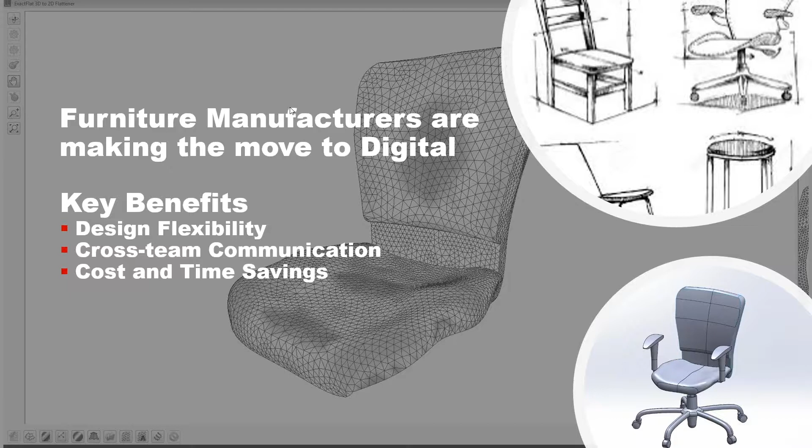Cross-team communication. So what we see is ExactFlat and Solidworks as the hub for the enterprise. So we can create our bill of materials, we can create our frames, we can create our fabric, we can send all this information out to different ERP systems, PLM systems, we can send our information to cutting machines, we can do our costing on the fly. So there's a huge benefit here for time savings and costs, of course. I'll go to the next slide

here, which is what we say: integration is key. And what we mean by that is one team creates the frame, one team defines the cushions, and changes are missed in manufacturing due to the constraints of the system. What we're going to show you today is basically how we bring everything together to work as a single unit. And I think that's a very exciting concept and one that I hope you can appreciate. So Ryan, without further ado, I'll leave it to you.

Sounds good. Thanks. So go ahead and mute yourself and get a sip of water or something there, get some hot tea.

So we want to look at three main broad ideas here. We have our design, we have our production preparation, and then we have our integration of hard and soft goods. And this is where it never has been highly integrated. And we want to show you that integration as it goes through here. So the integrated digital workflow, when we go digital, when we go 3D, really what we're looking at is a main thoroughfare of how the information is going to cross through.

Ultimately, we're looking at the linking and shrinking of the entire system. You're not going to have it spread out over a wide area. You're going to have it really streamlined, and it's going to be able to move back and forth. It'll be bi-directional. And when we look at this digital patterning workflow, we're really looking at the design aspect. How are you designing today?

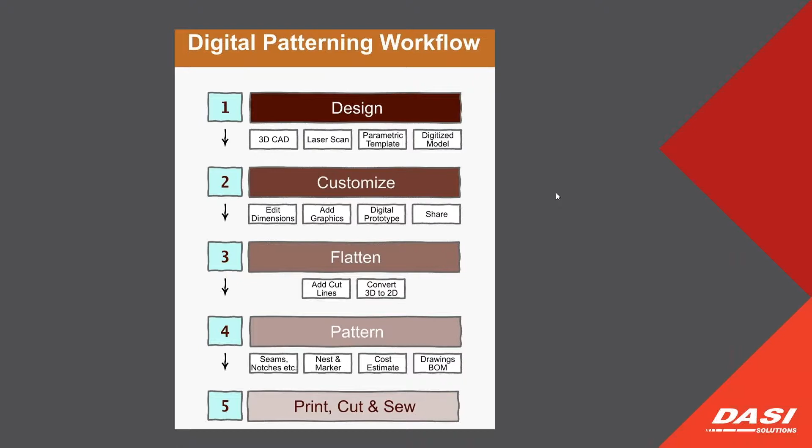So let's go ahead, we're trying to get rid of waste, we're trying to get rid of waiting. If you have a streamlined process, changes aren't the end of the world, corrections aren't the end of the world. And what you'll find is when you do streamline the process, your corrections of errors at the end seem to kind of disappear.

So let's get into a little bit of a demonstration here, and bring up a chair. This is a chair that was designed in Solidworks.

We take a look at it, we've got a couple different pieces and parts in here. We can see we have some areas we want to fabric up, but let's talk about the design aspect, especially when you get into the Solidworks side of things.

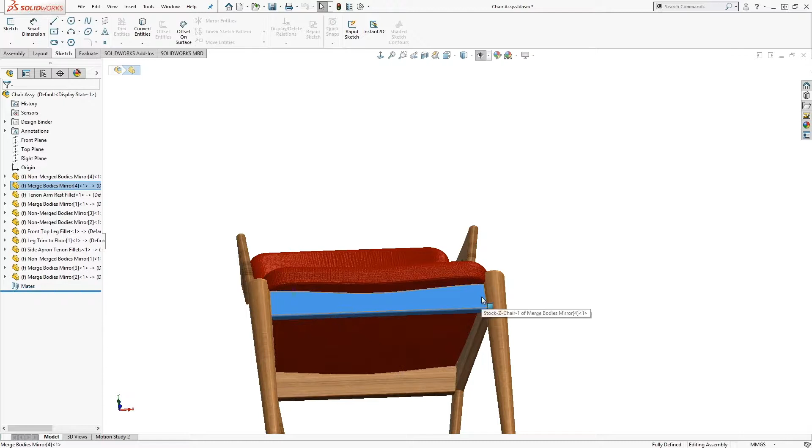So I've got this piece here that we want to take a look at. And what I want to show you is when we talk about ease of design and ease of use of the system, and making those changes, this is what it really gets into.

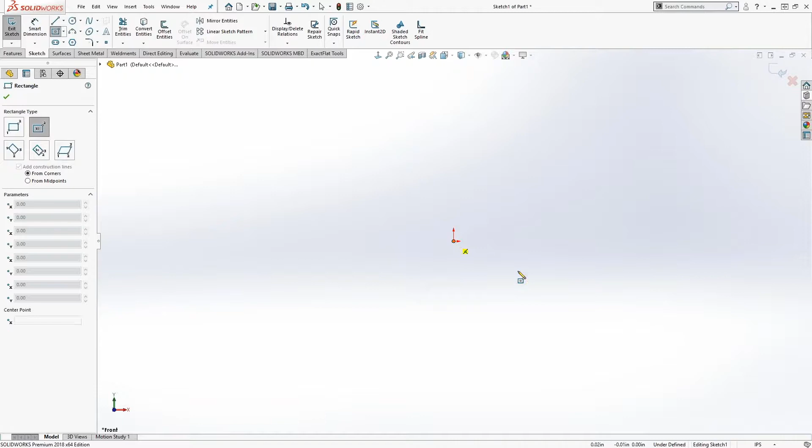So if I come in and create something new, I'm going to go ahead and create simple shapes. The simple shape in this case is a rectangle, if I'm taking a look at that cross beam there. On top of that, we have the ability to test things out.

What does it look like if it's thinner? What if it's taller? What if it's skinnier? Whatever's going on here. But once we get comfortable with something in there and what shape it is, we can go ahead and start adding our numbers in.

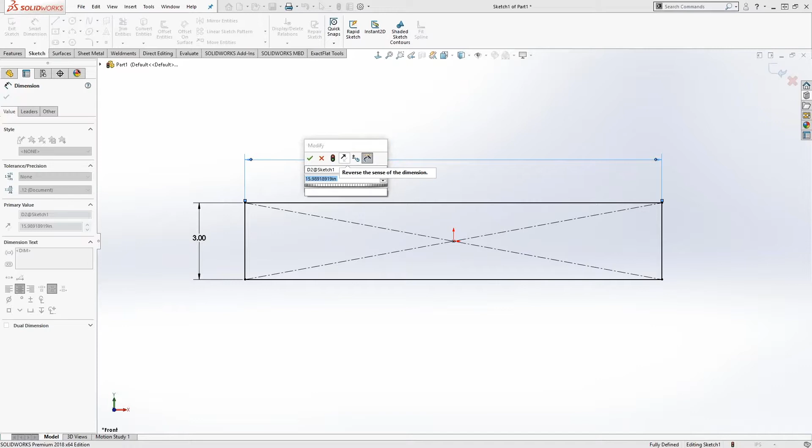So as we add these in, you'll see that the geometry comes together, starts working for us, and it'll stretch as needed. Now what we're doing here is what we call parametric modeling.

It means that we don't draw the geometry specifically to the right shape. You draw the general shape and then add dimensions on later. The beauty of it is that if you need to make a change, you simply change the number and it's going to update the geometry on the screen for you automatically.

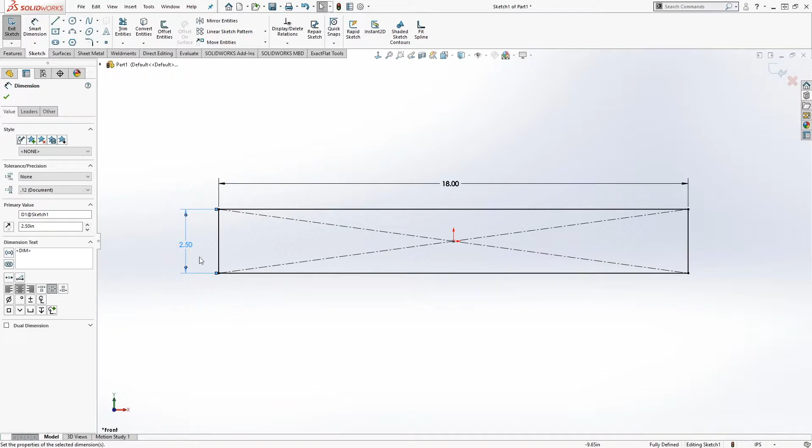We're going to go ahead and go back to 3 inches here and do an update on it. And then we'll take this 2D shape and turn it into a 3-dimensional model. Fairly straightforward here. Once you get it in, you can go ahead and grab whatever you need to, and you can see everything that's going to happen beforehand.

So we're going to go ahead and just make that 3/4 inch thick at this point in time. Also, if we take a look at this, when I say okay to that, we now have a nice little block on the screen. I know it looks simple, but simple is really how you get things done.

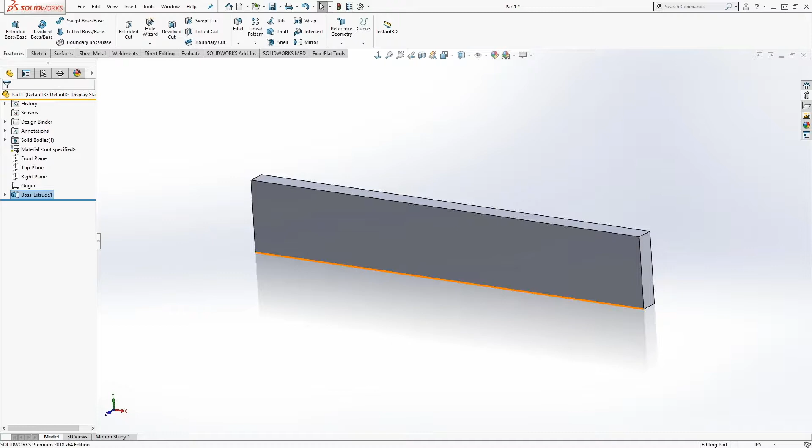We don't have to worry about the super complex shapes because we can go ahead and just take little bits and pieces here and add stuff or subtract stuff as needed.

One of the other things we had to take a look at here is that I'll go ahead and create a little bit more geometry. There's a little bit of a dip in the middle so that we have a place for the seat to sit onto. So we'll go ahead and add that in.

Along with this, what we're doing is, like I said, parametric modeling. So I'm going to add in a couple of little lines here. When we talk about parametric, we're talking about making something smart. Right now, if I take this and try to move it around, it doesn't stay centralized, and that's not going to work well later on if I have to make changes.

So just to make sure I don't have to worry about this, I'm going to make these little lines equal to each other. That means as I move one side, you'll see the other side automatically updating with it.

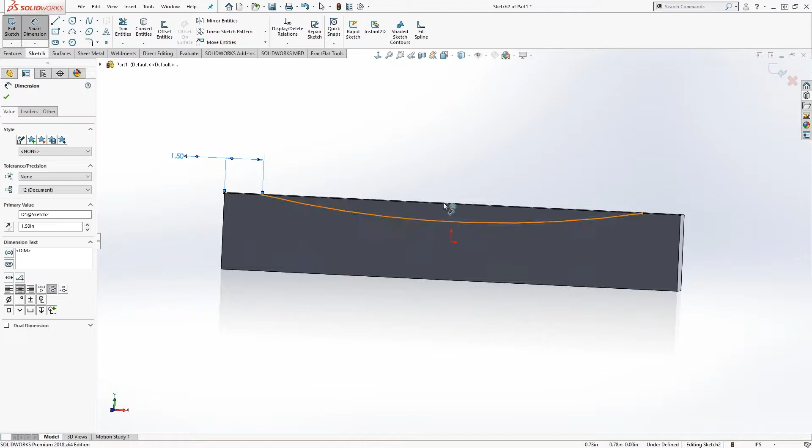Once we get it acting correctly, we can throw some more dimensions in here to shore everything up. So we can say that's 1.5 inches from the end, and we can control the actual dip here—we'll say that's 1/2 inch.

Once we're done with it, we get back into 3D, and then we can tell SOLIDWORKS that we want to cut that little scarf out there. You can see we're starting to build a shape and get it together here.

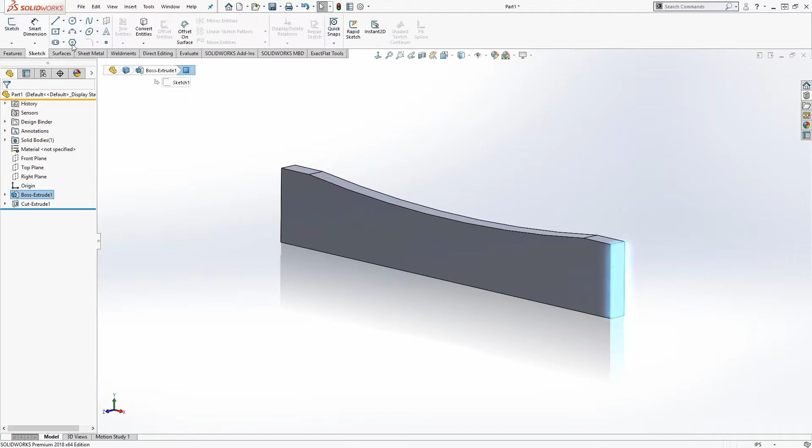Last thing I'll do is throw some tenons in here. I'll grab the end, and then once again use those simple shapes. So we'll add in a size here, and give it an overall length of 1. That's going to give me some good tenon geometry to work with.

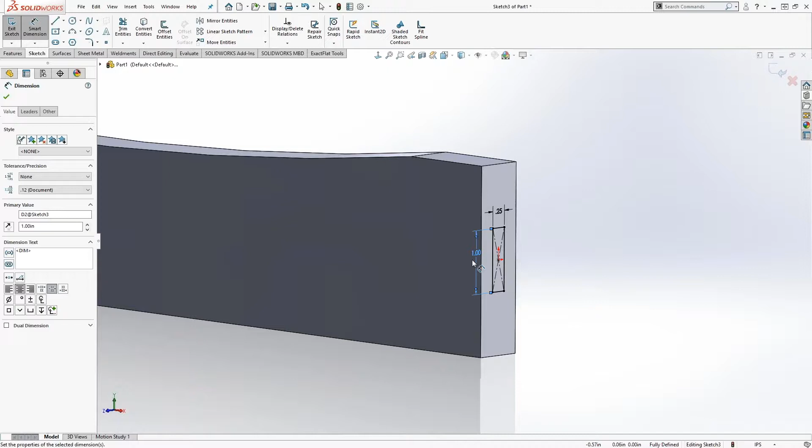As we spoke before, it's always this back and forth—you're into 2D, then 3D, then back into 2D, then back into 3D. It kind of allows you to finish up what you need to, see what's going on there, and then finish up whatever else we need to go with.

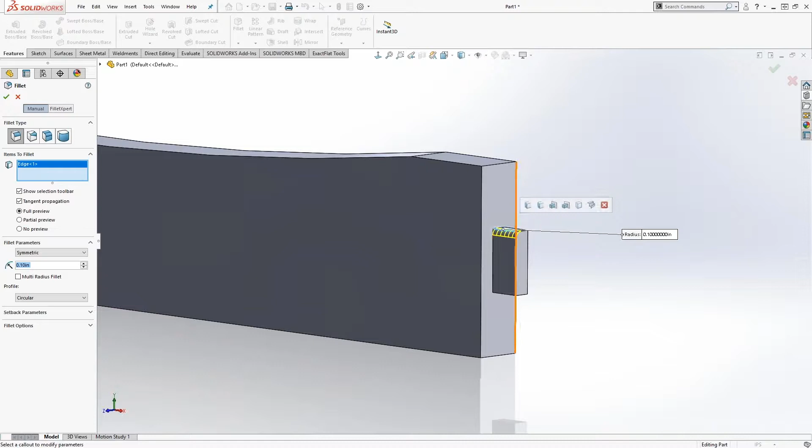In this case, I'm going to throw some fillets on here just to make them nice and rounded. I could pick all the edges manually if I really wanted to, but SOLIDWORKS offers a lot of tools to quickly add information in—type in what we're looking for, and it adds it in there for you.

I have to add another tenon on the other side. Why would I go through all that work again when I have a set of tools that lets me quickly reuse geometry I've already created here? So we'll grab everything we need and say okay to that.

When I zoom back out again, we'll see that we have that on the other side as well. The only other thing I might want to do is shore this up a little bit—I don't like the hard corners in there, so we'll put a nice big radius on here. Once again, we're getting instantaneous feedback on what it looks like, and then we can continue working with this to shore it up a little more.

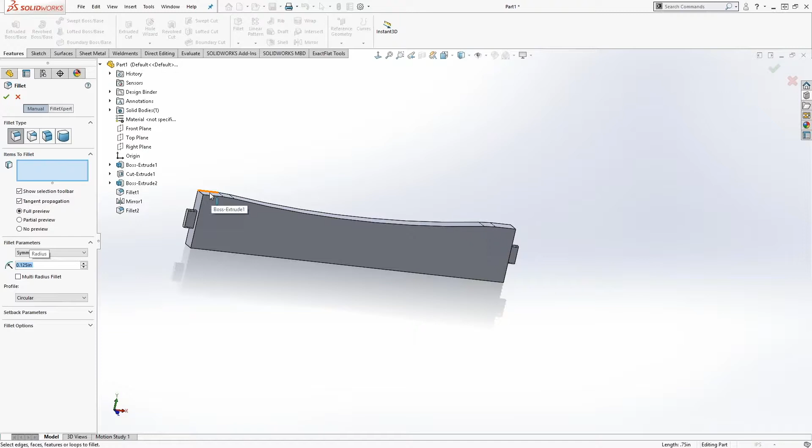So with just a couple of steps here, we're able to add in all the information required, and we have a part that looks pretty good here.

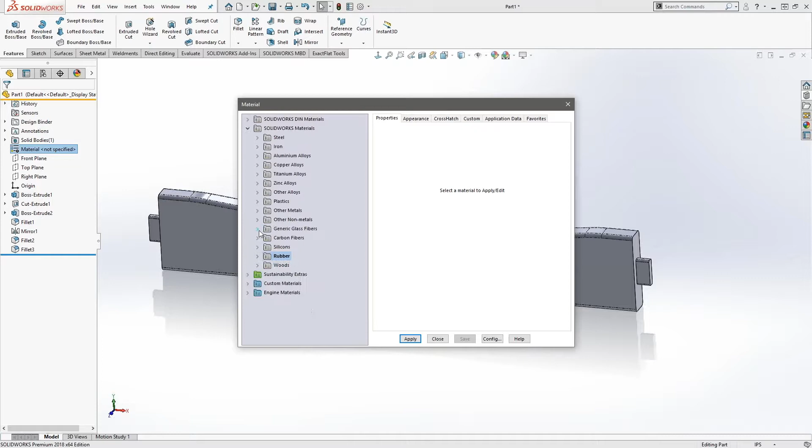The only other thing I might want to do is tell it that it's a piece of wood—depends on what you're working with. If you're working with tubing, wood, or whatever it may be, we have materials in here that will work for you. So in this case, let's make it mahogany. What this will do in the long run, since we're working with solid models, is give us the ability to do a lot of downstream processes, whether it's a stress analysis to see if this is strong enough, or packaging—how much does this weigh?

Along with the cost of the wood, you can check the volume of it and figure out what the cost may be. You may check the linear lengths of it. So there's going to be information that you might not have available before, especially if you're just doing 2D, or you're kind of just guessing and making the furniture organically.

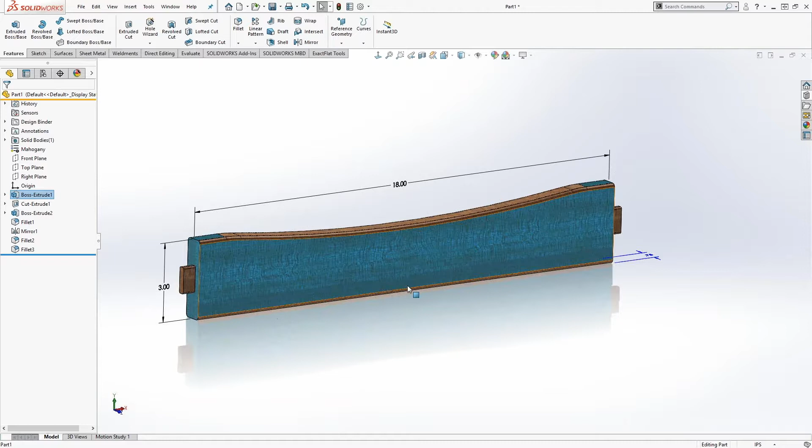The last thing I want to do here is, while I have some dimensions in here, I'm looking at these tenons, and the tenons don't look like they're long enough. So I'm going to simply double click on them and say, hey, I need you to be 1.5 inches long. So 15 probably wouldn't work out, let's do 1.5.

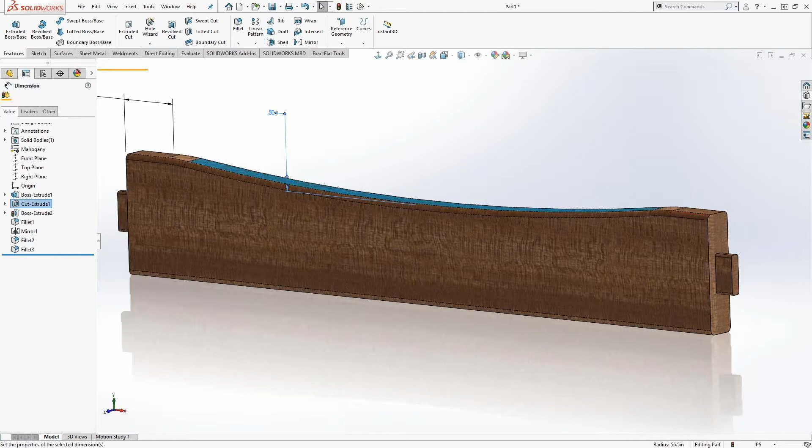Once I make that change, I can go ahead and look at some other items here. I think this dip is not quite deep enough, so we're going to make it a 1-inch dip there. And even here, let's scoot this back. So what you're seeing is I'm making lots of changes to the part, but quickly I'm able to see what those changes will look like in the end.

So it works pretty well for me in the long run. Once I get this done, I do have my 3D part, and really what I need to do is be able to communicate this to somebody else. Someone's going to have to cut this out, and I might have router information that I need to send out. So an ideal way to do that would be to create this as, say, a 2D drawing.

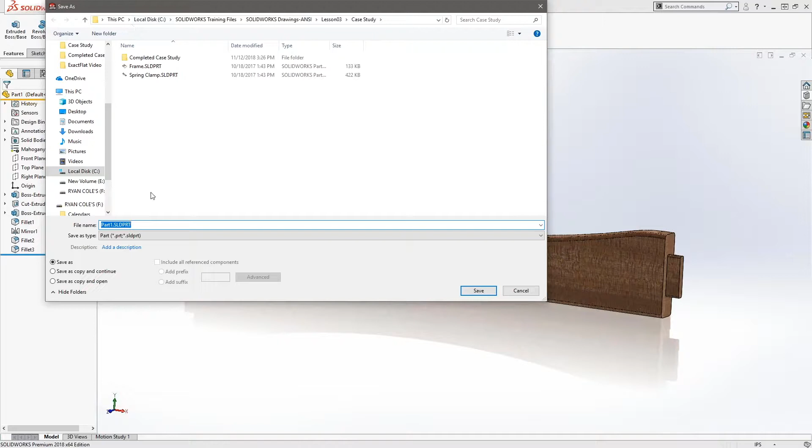Now, we put a lot of work into this, so let's make sure we don't waste the work that we put into it. So I'm going to come in and do one other item here. We're going to use something that we call DimXpert. What it allows me to do is to quickly add manufacturing information to the print itself, and let's go ahead and say okay to that.

Now you can set this up for your company, so if you are worrying about tolerances and stuff like that, it's going to be pretty straightforward to set it up. But basically what we've done there is been able to apply manufacturing dimensions without really putting too much work into it, and without having to reinvent the wheel and do extra work in the long run as well too.

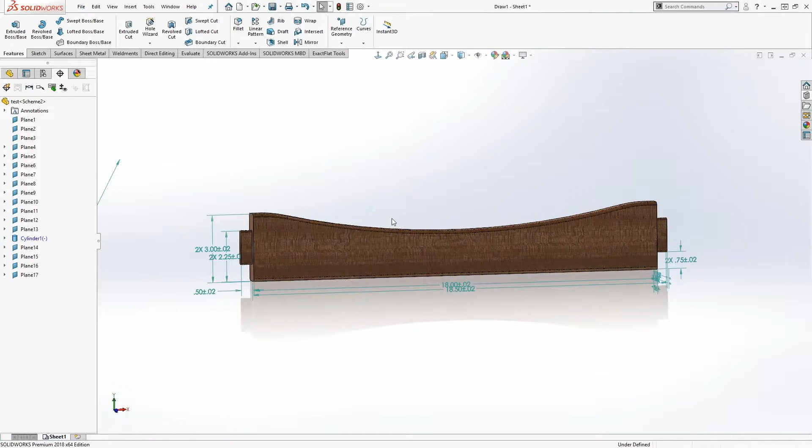So once I create that, I'm going to say I need the 2D drawing. 2D drawing should be fairly straightforward. And what I'm going to do is say that as I create the 2D drawing, I want SolidWorks to help me put the information into the drawing as well too. So I'm going to tell it to go ahead and bring in those dimensions.

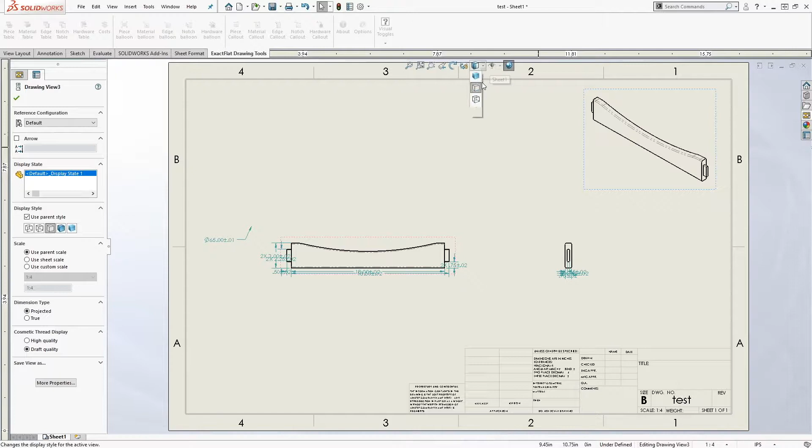As I pop these down, we can see that as I just drop them, it will go ahead and throw those dimensions in that I had on the part. And even here, we can add in an isometric just to make it look a little bit nicer. Now, even though this looks like a traditional 2D drawing, we do have a lot of benefits here that we may not have had before, especially when we get into anything like scaling or showing better information on the screen itself.

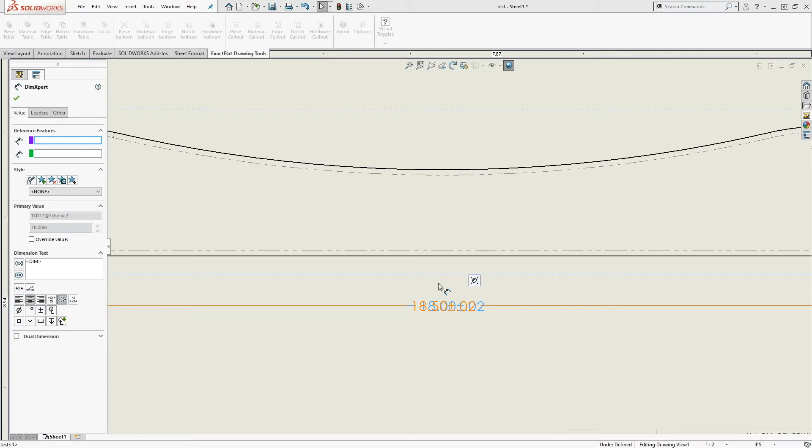The only thing you really have to do at this point, if there's any time being spent here, is going through and ensuring that the dimensions look good, they're in an appropriate place, they make sense, and kind of go from there. So we'll say that those look good there. This would be probably what I would call the fidgeting around with it, once again, just to put that information out so that the people on the floor can make the part a little bit better. So maybe spend another 5-10 more minutes with this, and you're going to be all set with it.

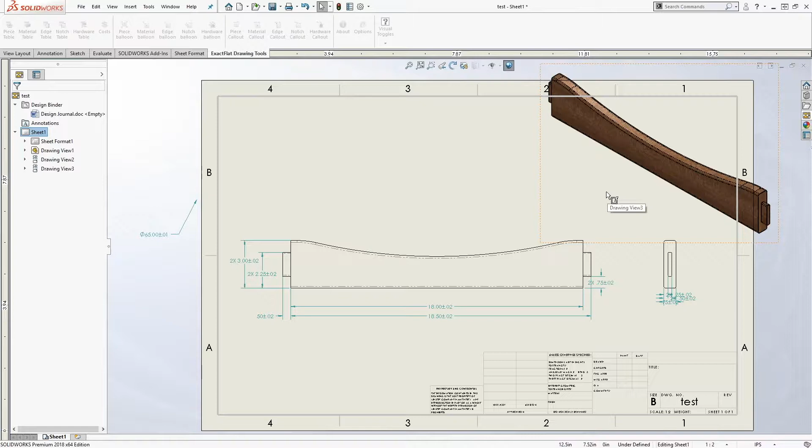And really what it comes down to is the fact that if I were to make changes here, I think that dip is a little too much anymore. So we can come back and always make the modifications as required. So let's make that 0.75, 0.745. And then we'll update the model.

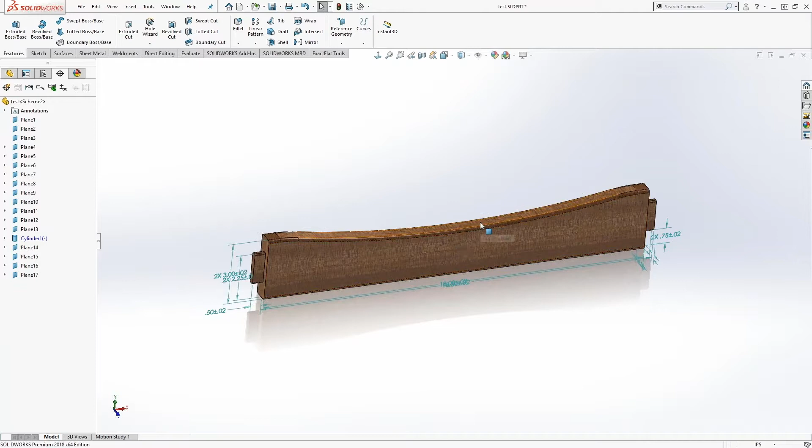We'll see that the model's been updated. And when I go back to my drawing, I don't have to make any changes to it. The changes have already occurred here at this time, and all I need to do is reprint it out. So no loss of time, no double checking. If everything was done correctly to begin with, it's going to work forever after that.

The only other thing we might get into is the fact that we do have assemblies. As you're building the parts, you're going to put these parts together, much like Legos in certain cases, and there's some more advanced functionalities that you can get into later on as you get more comfortable with the software. But one of the key benefits that we do have here is the fact that if I don't like something, well, I can go ahead and make a change to it.

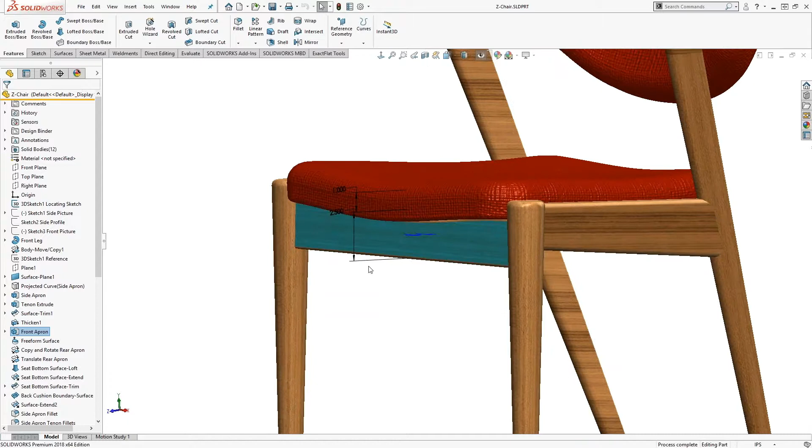So let me come in and take a look at this. And while I look at this, I realize that this may be a little bit too short. Maybe we looked at it, it looks like it needs to be a little bit longer. Well, just like we were making changes at the part level, we can make the changes here at the assembly level as well when it's all put together. Say I want to take this from 2 inches to 3 inches. I go ahead and double click on it. I tell SolidWorks to do a rebuild, and we can see that pretty quickly here. There it is. It will update it on the screen for me.

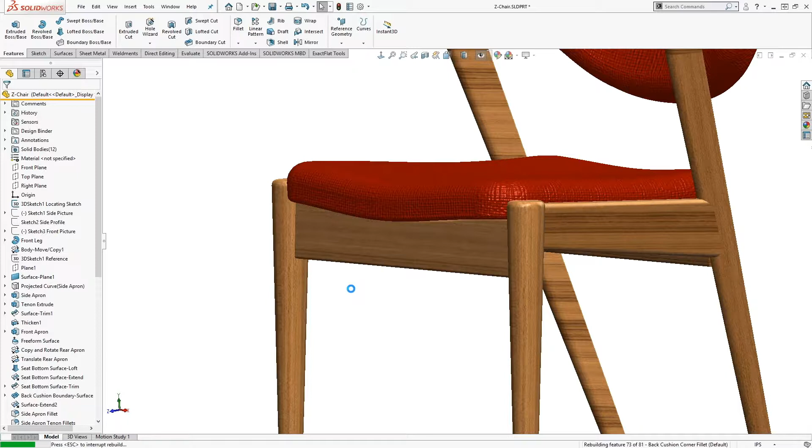So I don't have to make a change to a part, update the drawing, and then come into the assembly and go, oh, but it's not right here, and I have to make this change. Everything will be interconnected together, and everything is file referenced to each other as well. So once again, going back into it, making changes is pretty easy. It's on the fly, and we don't need to worry about too much more after that.

Along with that, you can get a bill of material out of here as well. So if you're looking at how many pieces do you need, what do you have to go with, what kind of hardware do you need if you want to put hardware in, that can all be inclusive into your assemblies. And then when you put your assemblies into a drawing, you do have that capability as well. So it is a full-blown CAD system. It should have everything it is required to create your actual engineered data.

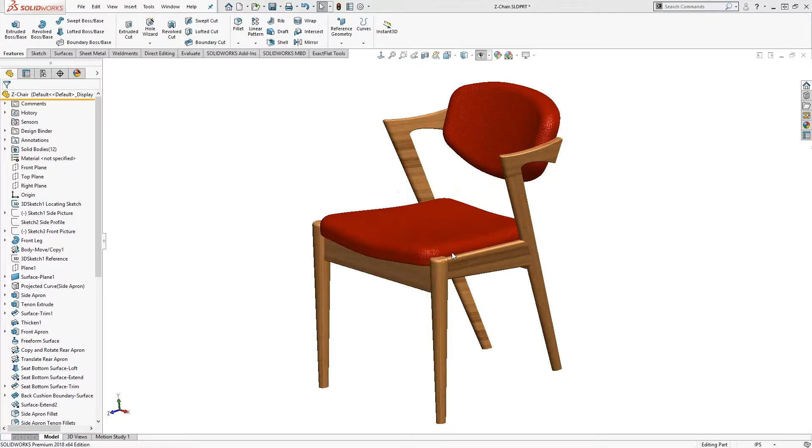So going through it there, obviously I'm going full power here, but really the walkthrough, less than 30 minutes. We created the 3D for the hard design for the soft components. Let's go ahead and go back a little bit here for more demonstration. And in this particular case, let's take a look at how ExactFlat goes into this whole process here. So let's get this part. So in this particular case, we've got our chair back, or the back of the seat here. And at this point, what we want to do is bring the ExactFlat tools into the system here. So Mark, I was wondering if you wanted to talk to everybody as we walk through this process.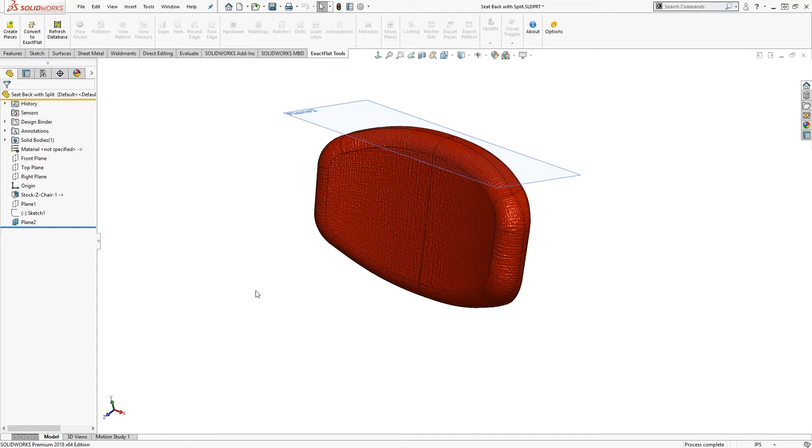Sure, I can do that. Can you hear me? Yes, I can. We can all hear you here.

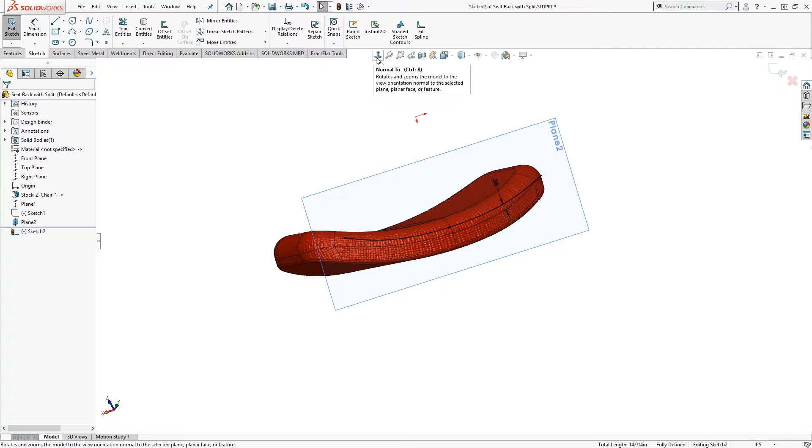Good. So basically what Ryan's going to do is he's going to use a create pieces tool. Create the seams first. Oh, he's going to create the seams first. All right. There you go. Now we have a seam. Sorry about that. So yeah, what we're going to do here is I'm going to create these seams real quick, and then we can let Mark kick in here. But really identifying those seams, this is going to be where the communications between the departments come together as well. So if you have a technical pattern maker, they can come in and either advise or even take over at this point as well.

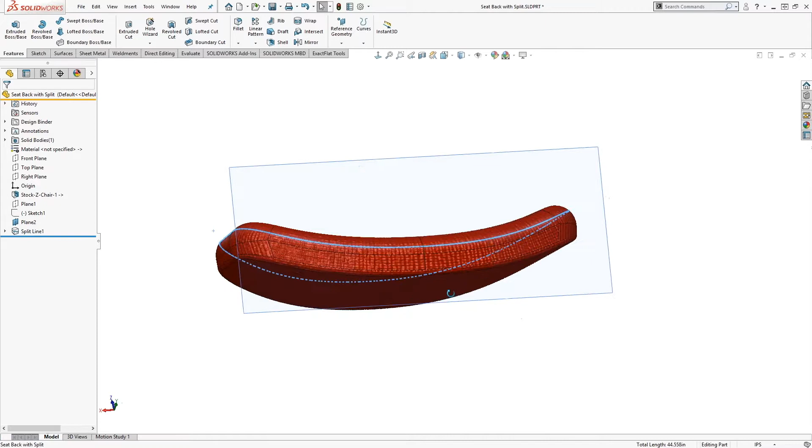So in this case, I'm just going to create some quick geometry. And we're going to tell SolidWorks where we want this to actually occur here. So as we take a look at it, before we get to the actual material and figuring it out, we're going to put a nice little slice in here. And if I grab this, we can see that there'd be a nice seam there for me to use. There's some nice seams in the middle for us to use, and there'll be a nice seam on the back here to use as well. So Mark, I will go ahead and jump into the ExactFlat tools. Okay.

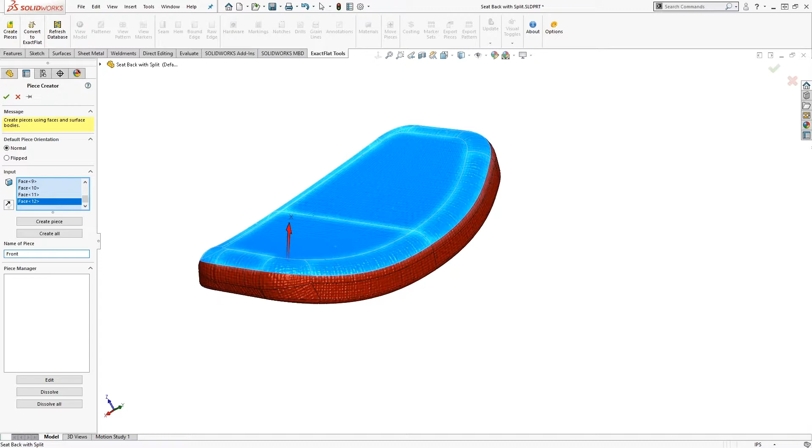Excellent. So what Ryan's doing now is he's just selecting surfaces to make a single surface. So he's joining all these patches, and it's going to create a surface. So he's just going to name it front. That's a good name. And go around, and you just basically select surfaces, name them, back.

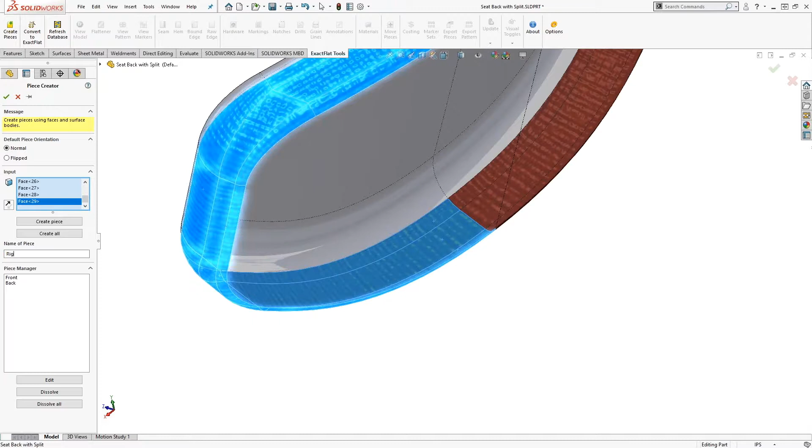And as he selects the surfaces, you can see they turn transparent. So if you had surfaces, in some cases we might have a surface underneath a surface you want to select. This makes it pretty easy to do when you make everything transparent. So now this is just about finished.

There. Awesome. Oh, I didn't type it right. There we go. Spelled it wrong there.

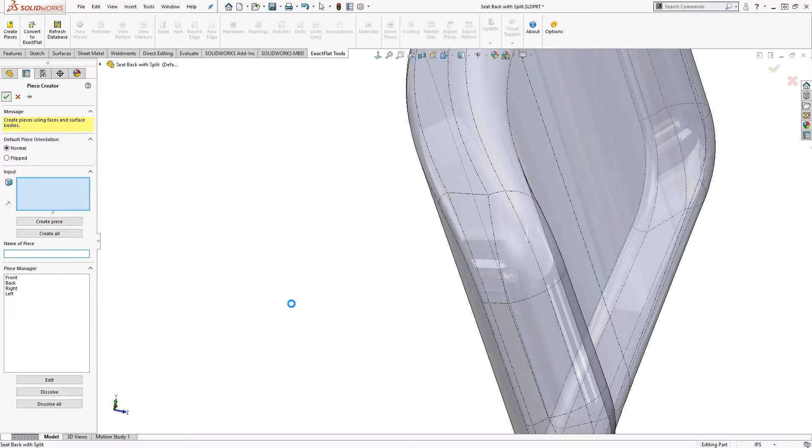So now we have all our surfaces created. The next thing we're going to do is we're going to connect to ExactFlat. So it's going to take the SolidWorks mesh, the render mesh, and bring it into ExactFlat. And now this will allow us to select what materials we're making the furniture out of. So if this was a leather chair or whatever fabric, you just go into the ExactFlat material manager and select the materials that you want to make the piece from.

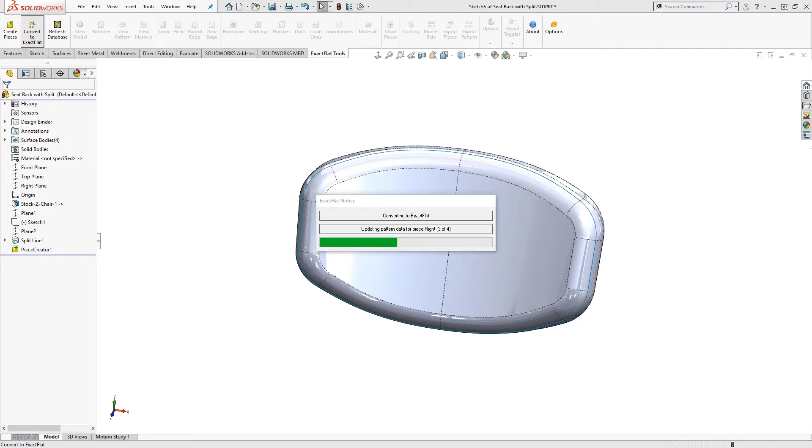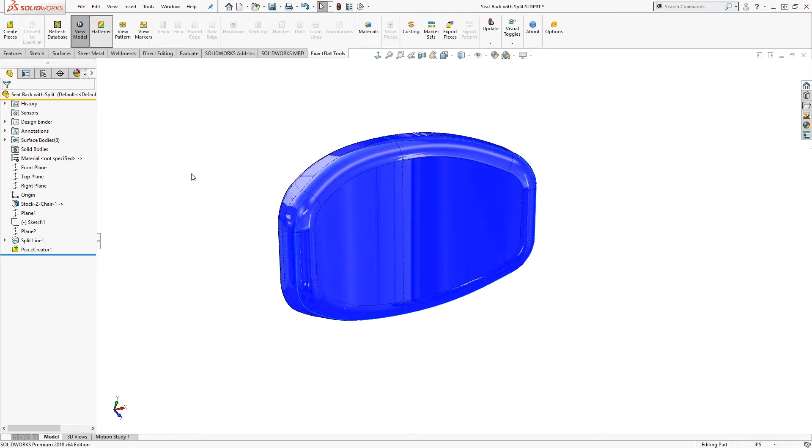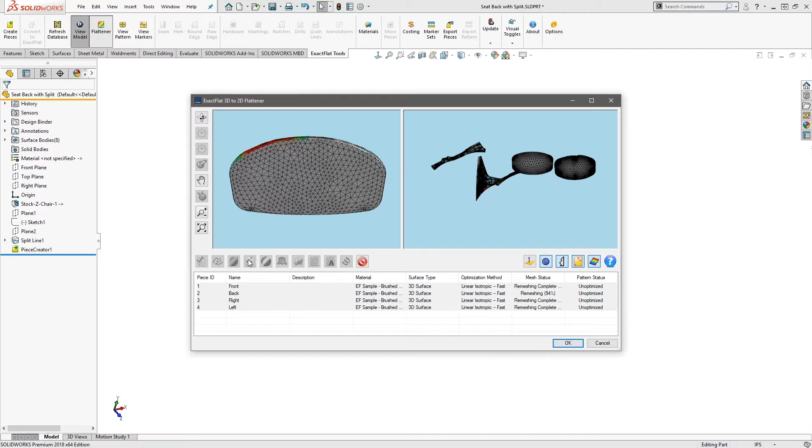So ExactFlat's a two-step flattener. The first step is this step where it gives it a projected flat, and then we're going to optimize, which means we're actually going to take the material properties and flatten it based on how that material flattens. So Ryan's just changing the mesh, doing an adaptive remesh, and now we're ready to flatten it.

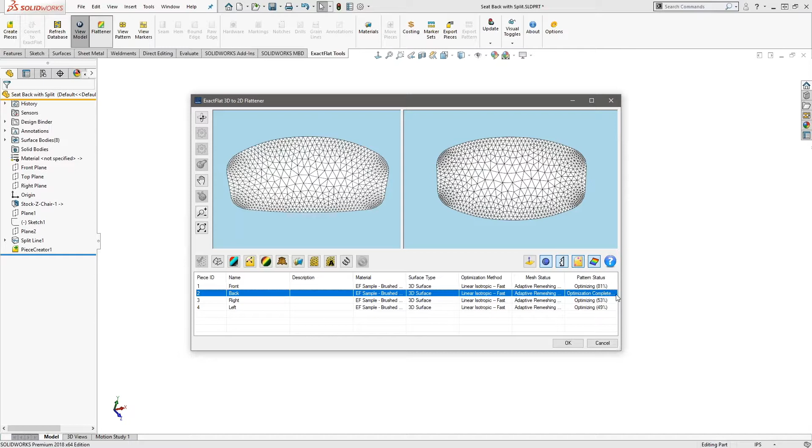So it's going to go through, and you can see the pattern status, and you can see actually the pattern piece is changing. And this is based on how that material flattens. So it'll go pretty quick here. That piece is completely flat. This one's done. And these other two little guys here will go through pretty quickly.

Let me bring up the database here. Yeah, we can talk about where this data is coming from. That's another unique feature of ExactFlat. It runs on a SQL database, and once you connect to the database, now you have base construction type. So if you go into management tools, Ryan, on the next column over, if you pick hardware types, whoops, no, the other way. Yep. There we go. It'll bring up different hardware types.

So here we have our furniture database. We have things like buttons, Velcro straps, J-hooks, labels. So we have the information of the item, the cost of the item. You can have the vendor for the item. You can assign different colors. And it's quite easy to add a new item. If you just scroll right down to the bottom where there's a blank space, you could type in whatever new item you want.

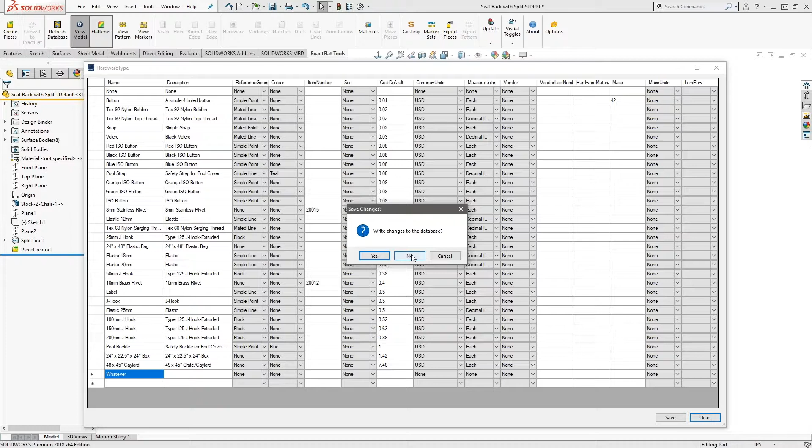A whatever. Yes, you could put a whatever there. I had to put the laptop up to my head and see what you were writing. Oh, sorry. I don't have my reading glasses.

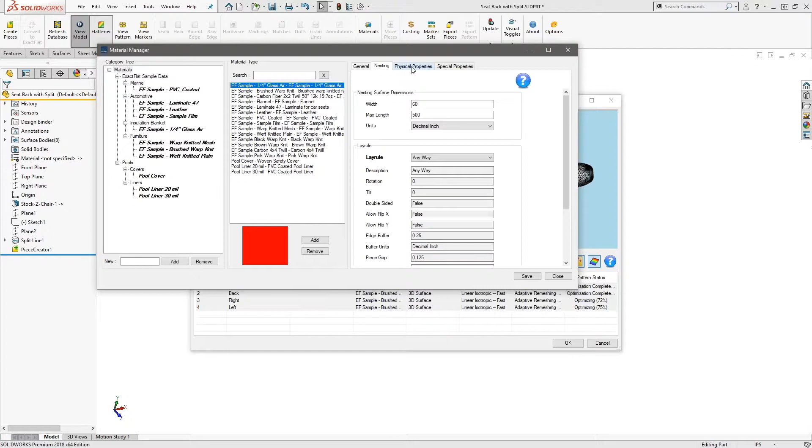Anyway, so basically as you go through, we have access to all this information, which once you tag a material, follows it through the whole stream, all the way downstream and upstream. So it's a fairly unique option in ExactFlat. And these are the materials here.

So can you click on the nesting tab? So when you have a material selected, such as we're doing on that chair, it has the lay rule. So how that material has to lay on the cutting table, the rotation, the tilt. It'll give the length of the roll, how much is left on the roll, what the width of the roll is.

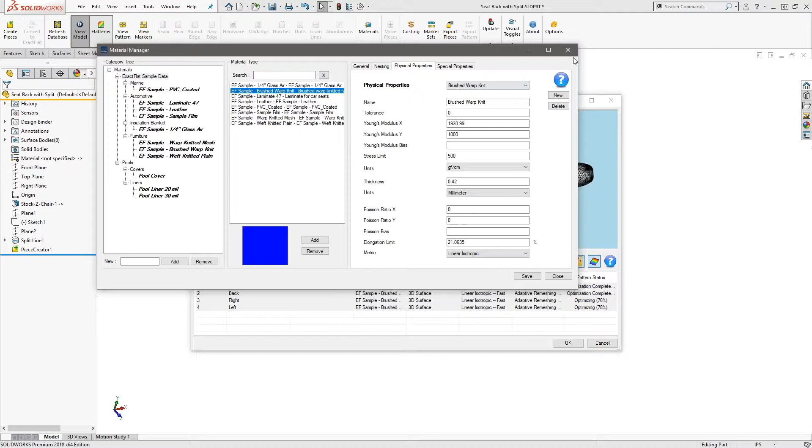So all this information is attached to that item as soon as you click on the material, and it's pretty cool. Anyway, all right, and that's the physical properties.

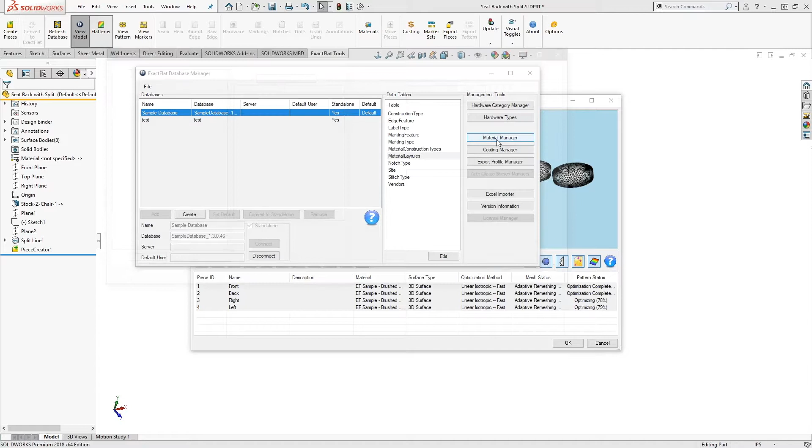So one of the things that we can mention too is that we have the ability. So if you have a specific material that you want tested, we have labs that test our materials for us. It takes about 3 to 5 business days, and it's about $20 or $25 for a material test to be done, and then you could add that material into the database. So if you don't have the material information, we can do testing for you and get that information for you.

Anyway, I think those last two pieces are pretty well flat. I mean, you could just stop there, I guess, really. Okay. Yeah, there's no funny bumps or anything on it, so I think we're pretty happy with it. Yeah.

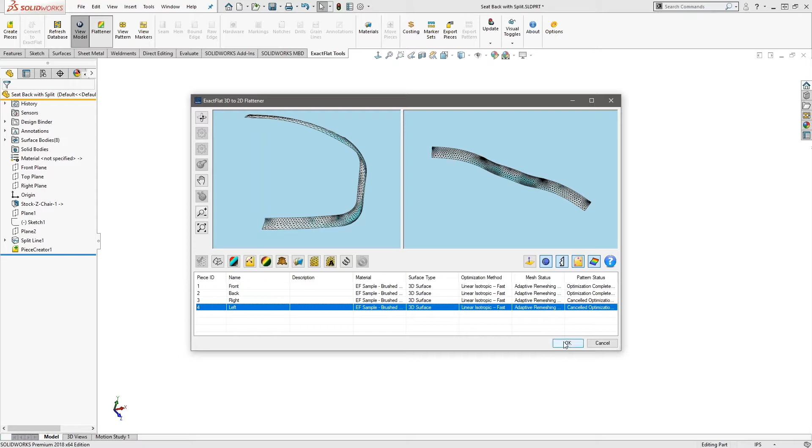So now what it's going to do is take the flattened pieces and put them on what we call our pattern view, and that's where you would add your seams and notches. So it's going to rebuild these pieces from that step and go into, as I said, the pattern view. One of the tools that we have is a tool called, pattern makers will understand this, walking the pattern. So we're able to match pattern pieces together. If you had a file that might be 10 or 20 pieces, you can use that tool and you can align all the pieces up, and Ryan can kind of show you that too.

So, this will take a second. Sorry about this. It's got to align all the edges up. What else can we talk about? I guess the other thing would be... I don't think it's ever taken this long. It is a program, right? Yeah. I think it's the last piece it's doing. Yeah, it's the last piece. I'm telling you, it's my computer. It's messed up. I got my IT guy working on it though. Oh, there we go. Yeah, it is those last pieces. It's drawing that geometry, trying to get it in right. It's 3 and 4. So it went through 3 and now it's working on the 4th piece, but it'll take a second. It'll snap out of it.

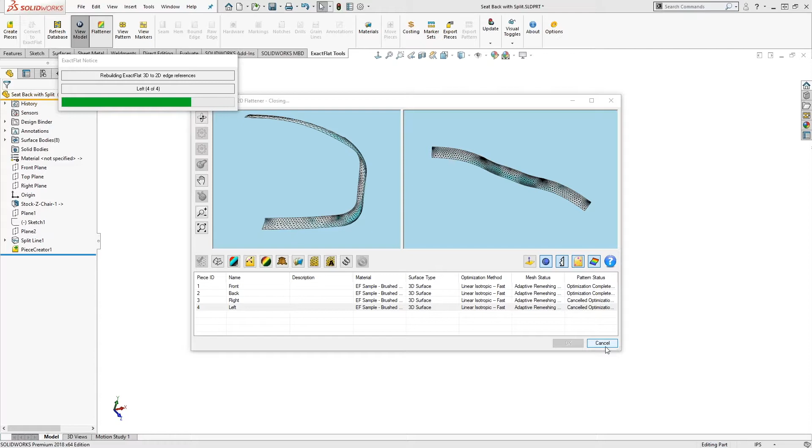So as far as that testing, I've had a couple customers go through the testing, and you are right. It took about 3 days to get it back, and it takes less than 5 minutes to actually get that material in the system. So it's not some long drawn out process, which I was really pleased to see. Yeah, and if customers do have the data, we have the ability that you can, I call it hand bombing, type the information in yourself. Although some of the mills don't provide all that type of specific information, so it is good to get it tested. And it's reasonable. Definitely. Oh, there you go.

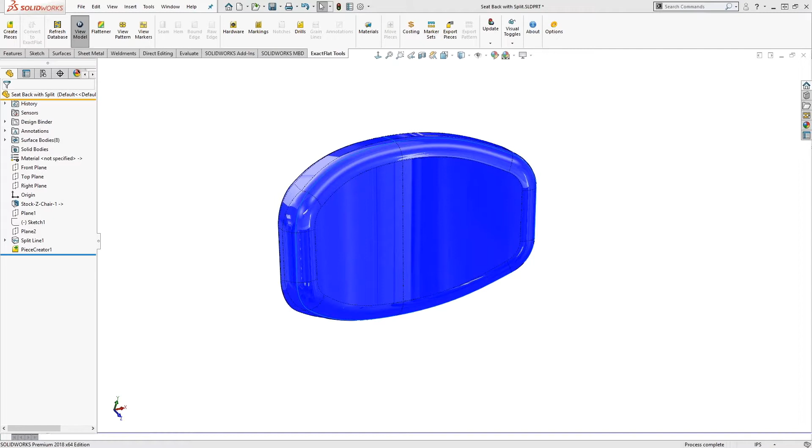All right, so now we're going to be updating, and I think this is where the flat's actually being generated after it's figured out its geometry. Is that correct, Mark? That's exactly it. So all the pattern people know, the flats and setting up the, there you go. So those are your pieces, all flattened.

So I'm going to move these around a little bit, and if you want to tell them what I'm working on here. Yeah, so this is what I was saying before. We call it walking the pattern. So what you're doing is you're just lining the pieces up, and you'd select an edge, and we have a tool called a find tool, and that's what Ryan's doing right now. So you can basically see how the pieces are going to line up and how they get sewn together. So if you do like Ryan's doing a 1-inch seam offset, that'll allow him to actually throw a seam on there and see where it's going to go when you put your notches in and whatnot.

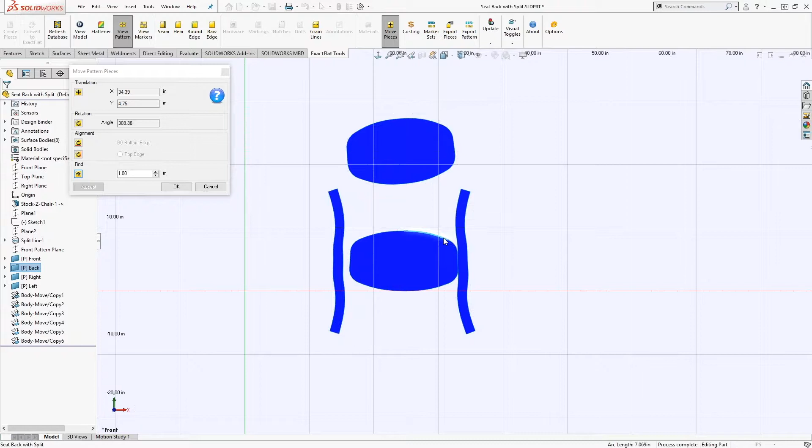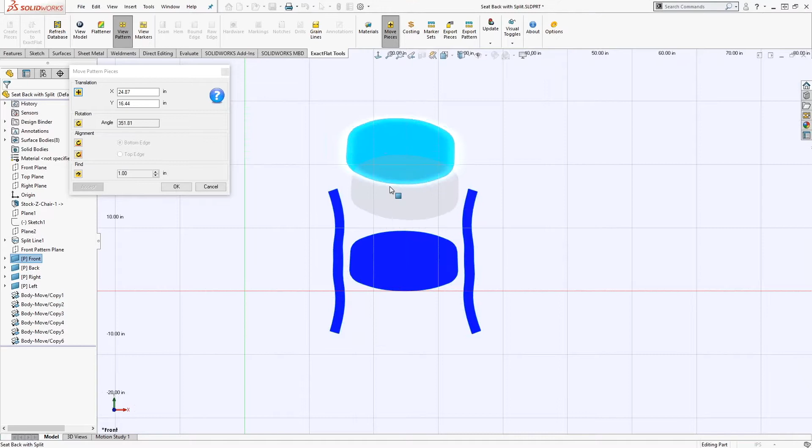But in the old days, and it's still done this way, you would actually take your 2D pieces and you eyeball where the two pieces join together, and then you put a notch and make sure it fit on the other side. In this case, because we're coming from a 3D model, we know where all the coordinates are from the 3D to the 2D, so it allows us to do walking the pattern automatically, or automagically.

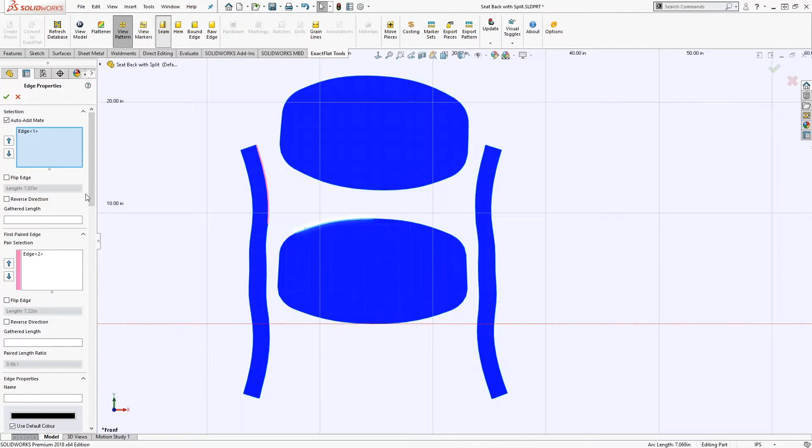All right, so now that we have that in, probably the next step would go to seams. Yeah, let's throw some seams in there. The seams are coming out of the database as well, so yeah, the 2-inch seam might be a little bit too much, but there you go.

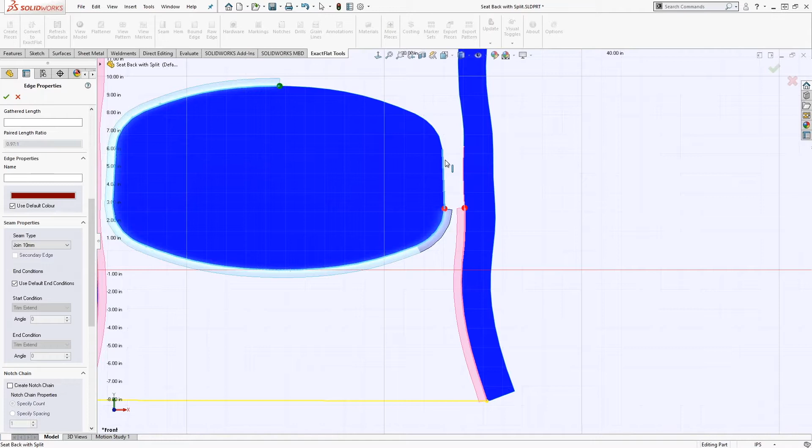Yeah, 10 millimeters good. So as Ryan's selecting one edge, you can see the other edge is automatically being highlighted, and as he goes around the edge here, it's going to create a nice seam for us, and you can see the start and the stop of the surface. So basically, we're going to do the seam on the other side, and then the next step would be add a few notches.

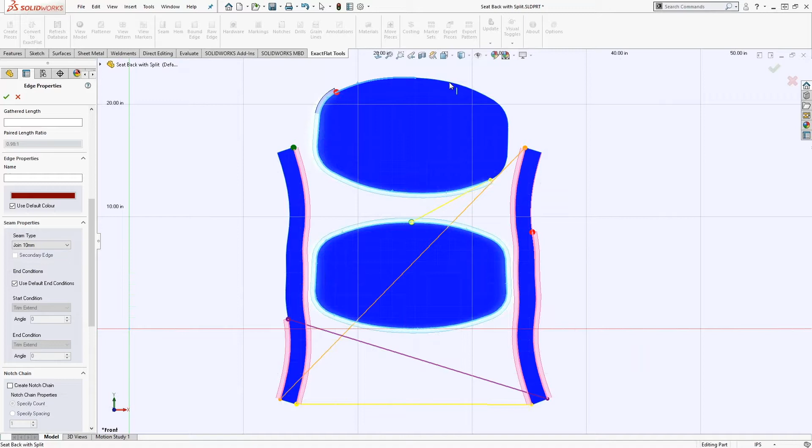And as I said, all this information is stored in the database. So we have some customers that might have 20, 30 different notch types and a whole plethora of seam types. So all that information is stored in the database and is completely customizable by the user. So we're going to create a notch chain, come up from the database, ask what size notch we want. In this case, we've got a 1/4-inch V notch, and it's put 3 notches there.

So you can either do it by number of notches on a part, or you can click specify a length. Oops. There you go. There's all the notches because they're 3.94 inches. And they all line up perfectly, so no eyeballing.

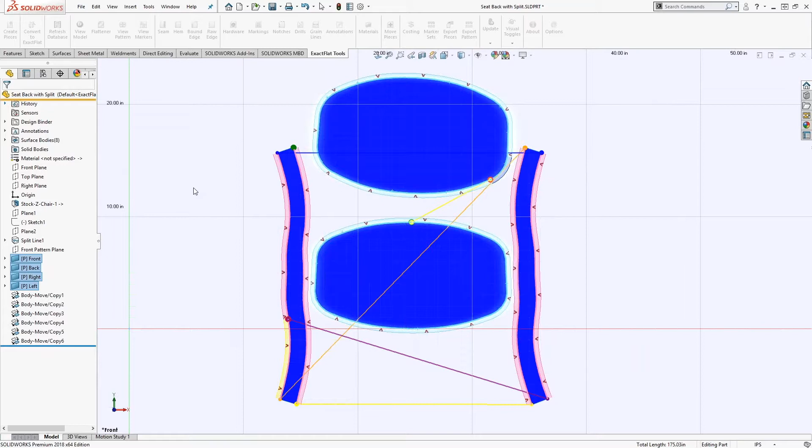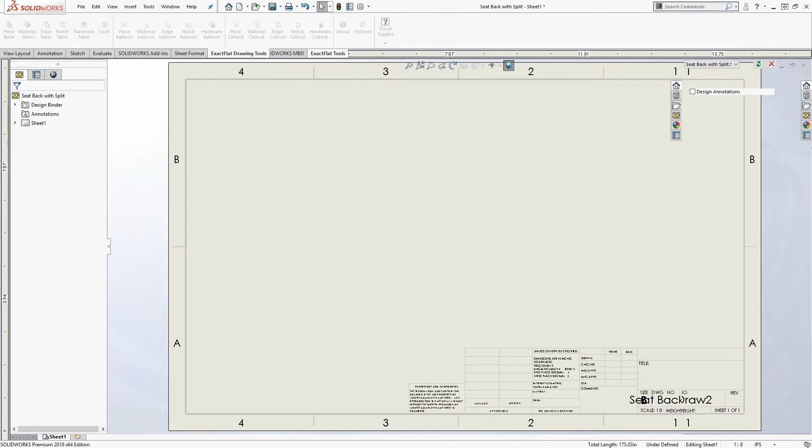All right, and then probably we want to look at drawings too, right? We talked about drawings, so let's go ahead and turn this into a drawing. And so we'll kind of jump back into SolidWorks here for a second. And it kind of works the same way. Even though it came from a different piece of data, we still have the ability to go ahead and drop that flat in there. You can see that not only do we have the seams showing out, but we do have our notches in there as well too, and they'll be able to see those together.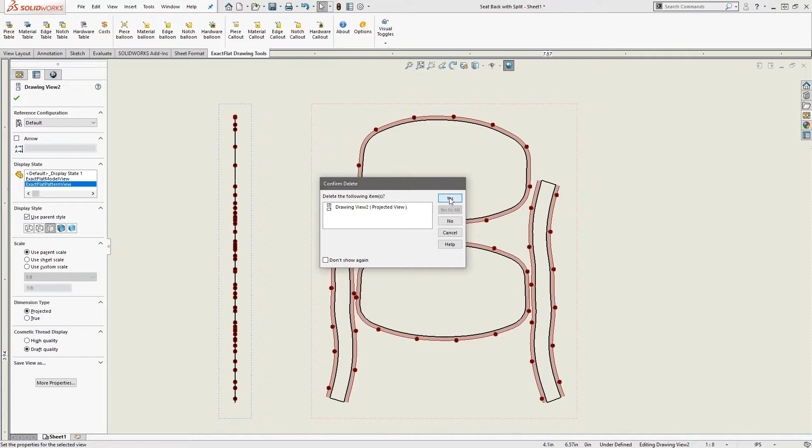Along with that, we're going to want to go ahead and put some other pieces of information in. And this all depends on what you're looking to do here. So in my case, let's go ahead and we can throw in the piece table. Piece table is just going to basically give us a list of all the pieces that were in here. And we'll also see that they get a piece ID along with the piece name as well too.

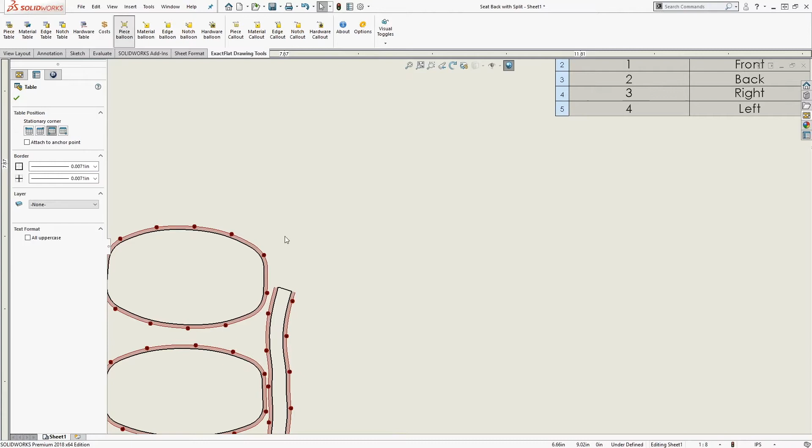And the piece ID is basically going to get connected up to this particular, there we go, this particular piece. So as I tag these out, we'll see that everything kind of just conjoins together. But up here, we do have material balloons. If you are using different types of material, you do have the ability to call out the different types of material. You're not relegated to one material per part as well too.

If you're using maybe some suede and you're using some leather together, then you can actually have that mixed on the single piece, and that's where the material balloon would come out a little bit nicer. If you need to talk to the people that are actually sewing it together, you can tell them what the edges are, what the notches are. If there's any hardware there, whether it's a J-hook, a snap, Velcro, you can go ahead and call that out as well too, much like an assembly inside of a 3D CAD system.

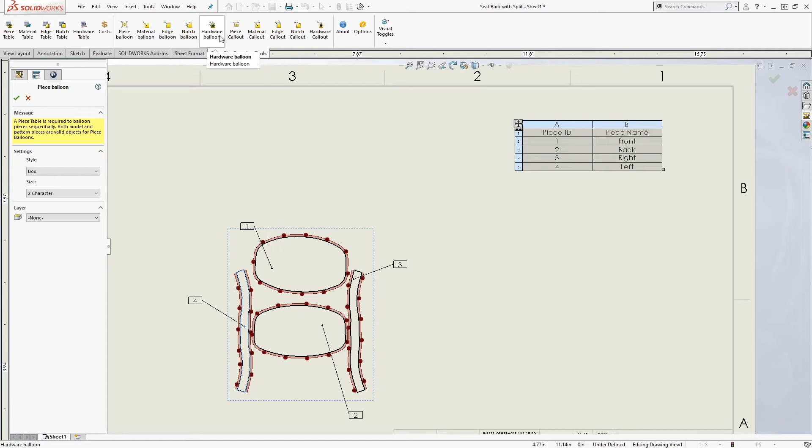Other than that, we can go ahead and get out of here. We do have the costing capability. The only other thing that we would probably want to cover here is your final outputs. And let's flip back over to the component here. And if you want to walk me through this process here, this will be under the view markers, correct? Yeah, absolutely. So the next thing is you want to go out to your cutting table.

So we're going to have our marker view set up. Ryan's got the one piece and it's ready to go to the cutter. ExactFlat has 2 capabilities. It has manual nesting, which means that you can just drag and drop pieces onto the marker just like that, and we have collision detection, so it'd show if you bump into something, you can't do that. But we also have automatic nesting, and automatic nesting just creates a nest automatically for you.

It takes the parameters. If we were doing 200 of these chairs, it would just throw 200 on the marker, and it would nest those, so it compacts it to save as much material as you want to let it run for. Anyway, in this case we'll just hit export, and we'll export out this file.

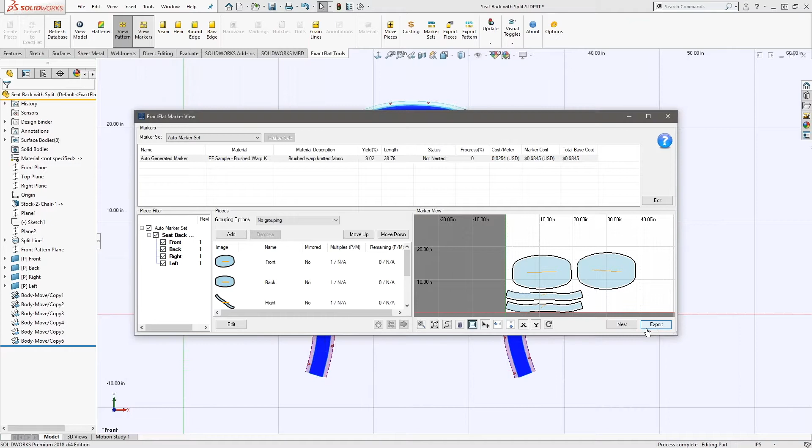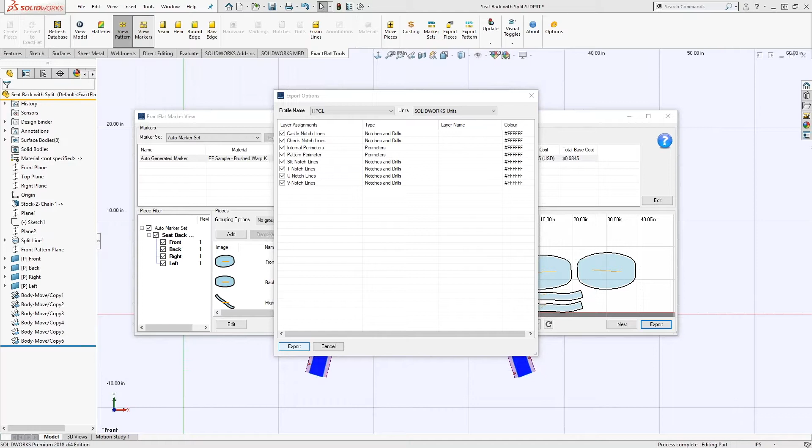And we select our cutter. We create profiles so we can export out to any cutter, Gerber, Lectra, Eastman, Autometrix, whatever cutting system you're using, and I'll just create a file that has a profile. So it's a DXF file that has a profile that would have the layer information required for that cutter or plotter, whatever you're using.

So we just created this auto-generated marker and put it on our desktop, and we can show you. Right now it says that the part's ready to view, so we'll view the part in eDrawings. And that's just to verify that data was written out.

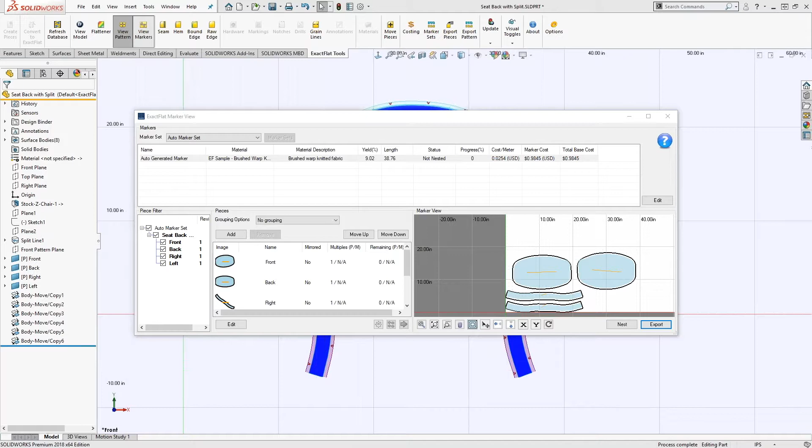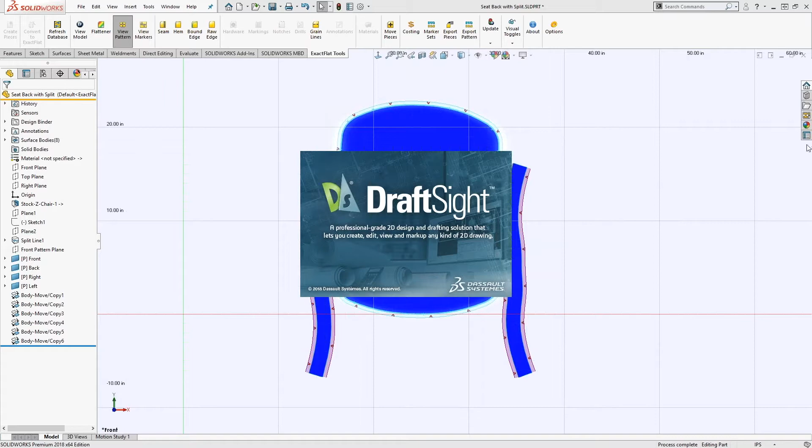Oh, DraftSight. Dang it. Sorry. I don't know why it's opening in DraftSight. There's your verification. We'll just look at the verification. So eDrawings is usually what I would use. I had this one turned on for some reason. I do apologize for that.

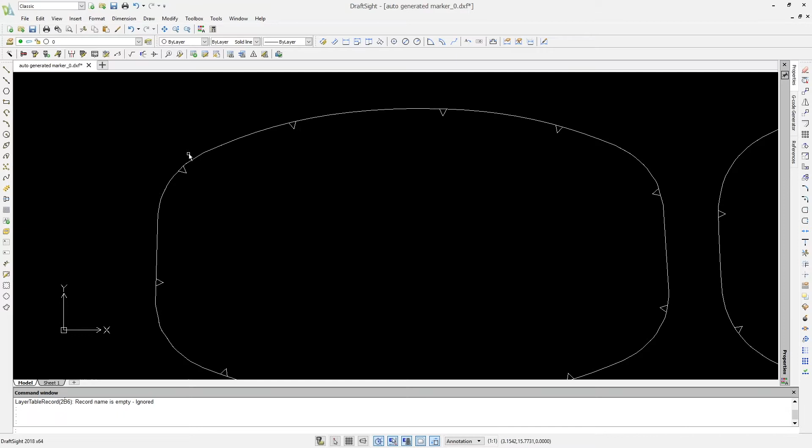But you can see that not only the outlines are there, but also your notches. So when you send that to the laser, when you send it to the cutter, whatever you're using to do that, that's all just going to come through. So right on.

Let's get out of there. Cancel. It's the last time I let my child use my computer. That's what we'll blame that on.

Okay, well, let's take a look at this, going back into here. So best practices for furniture makers. We walked through this and we did a lot of talking. There was a little bit of wait time you saw there, but that's probably worst case scenario. There was a lot of stretching that it was trying to account for, and it is accurate data as it comes through. So what we walked through was creating the 3D design for the hard and the soft components. We prepared all the parts for production.

We didn't do the CNC, but SolidWorks does come with a 2.5 axis CNC addition already inside of it, and even at the base level of SolidWorks, it's available to you. So getting information out to a router if you are cutting wood and stuff like that. But even if you get a little bit more curvy and more 3D-ish and you're looking for more complex patterns, there are steps to get those in as well.

Once we created the patterns, it was pretty straightforward. We added our seams in, we put our notches in, and then we ended up just sending out that DXF to the cutter, and we got it so that it worked with the cutter automatically. And that's going to be one of those little setup things that we just make sure that you're all good to go from there. We want that to be a click button solution, and that goes back to the whole linking and shrinking.

The other nice thing that we have here is if we were to make any changes on the 3D model that we'd already done the patterns on, it's actually a pretty easy button, and I'll just point to it. There is an update regimen that you can go through where it will re-flatten everything back out for you and figure out if there were any changes, if there was a length change, a size change, those patterns will update again. And then once again, it's a simple process of going into the view markers and re-exporting it back out to the cutter to get that change cut out as soon as possible.

Managing the changes, there's communicating updates across the team. It doesn't take forever. It doesn't take one person to do one thing, one person to do another thing, trying to communicate back and forth. The programs are actually pretty easy to use with a little bit of training. And once we get you into the program, we find out that those changes are very easy.

Any one person could probably do a change, but even if they don't want to do that change, they want to communicate, it's an easy process to get the change done and have that move downstream. And really, that's that whole waste and waiting that we're getting rid of. It's not you say one thing, someone else does something else, you wait for it, then you reprocess the data, then you bring it back in, and then you find it's not right.

It gets rid of that. It really does streamline the communications. The other benefit is you're ensuring the fit interactively. We're making sure that it fits before we even start cutting.

We don't have to do a test run, we don't have to build a mock-up. In a lot of cases, especially on this chair, once we get comfortable with the program and know the ins and outs of it, you can give it one try and next thing you know, you're fitting everything up right then and there, and it's a good product on your first prototype as opposed to doing multiple prototypes.

So we talked about a chair. This may not be directly in your market, but really what we're talking about is the hard goods and the soft goods and the final melding of those together without having to bump out of the system. Once again, that's the linking and shrinking of the entire process.

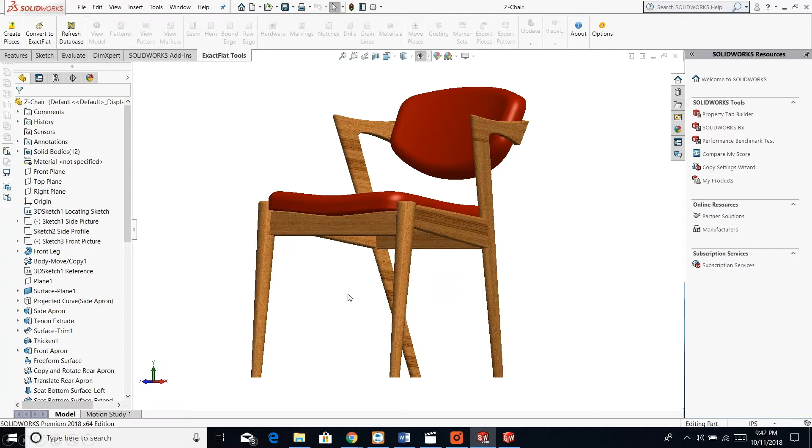I guess at the end of this, what we'd like to do is address a couple of questions that came through. It looks like there's at least one question from Nathan. I'd like to go ahead and attend to that. So Nathan asked, how do you mitigate the patterning for cushions that are not directly fabric on foam?

A feather wrapped foam slab as a seat cushion - would you model the crown effect created by the feathers in SolidWorks, or model it as a piece of foam that gets wrapped in Dacron? Do you model the foam dimensions, or the foam plus the Dacron?

This is one of those things where I'm going to throw that over to Mark. Mark, did you hear the question? Yeah, yes, I did.

So basically, I'm trying to envision modeling the cushion itself. I'm very familiar with doing the engineered foam, where we're basically just taking the surfaces - I can use an example. We did a wingback chair previously in a demonstration a couple of years ago, and what we were doing is extruding off from the cardboard surface that was on the inside, extruding that out and creating the cushion, then using the surfaces of the cushion to flatten. We created our seams and everything just as Ryan did, and we flattened that, and it was very accurate. We were able to create those patterns quite quickly.

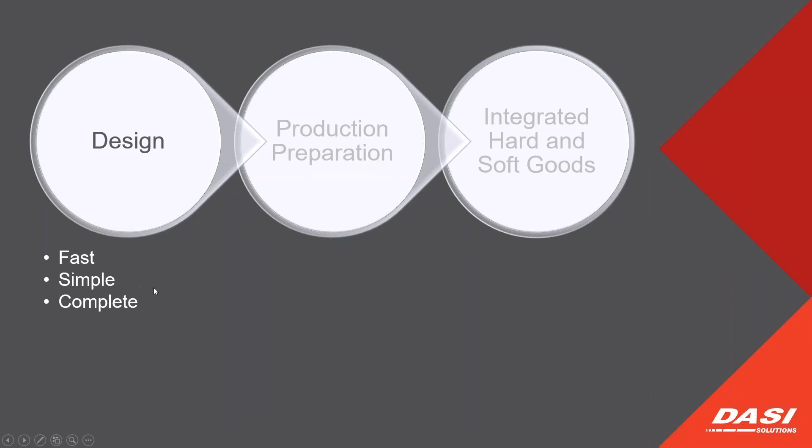When you get to the production side of things, the CNC simulations, the fact that you can actually run your cutters inside the program and then send that information out. The pattern details, knowing how they're laying, what's laying, how they look flattened out, adding in all the little implementations you need, your notches, whatever it may be.

And then you come down to the assembly instructions as well - how do you put those together? That's going to be good for most, for the hard goods and the soft goods.

Last but not least, single design environment. You'll notice that I stayed in Solidworks the whole time unless I was showing you something. You do not have to export out, you do not have to import in. Once you get it into the Solidworks environment, you stay in the Solidworks environment and everything back and forth goes from there.

You have better cross-team communication, the ability to look at that information and make changes. With our different viewers, you can either give someone access to look at something or access to change something. Ultimately, going back to linking and shrinking the entire process, this reduces cost and time, which is what's on everybody's radar. Once everything works well, it's going to be nice and streamlined. We're always shooting to get it most correct the first time out, and it just gets better after that.

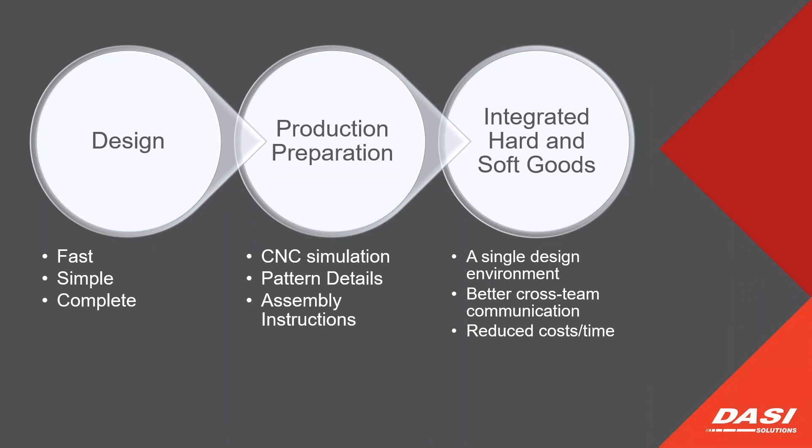I do have a thank you slide, but we got a question from Matthew. It says, does this work the same in Rhino? I'm going to throw that over to you, Mark. Does it work the same in Rhino?

Rhino is a different package. Rhino has the flattening capability, and they both have the same flattening engine. The difference between the Rhino version and the SolidWorks version is that SolidWorks has all these integrated tools, seam tools, notching tools, and a much more extensive database. So if you're just looking at flattening things, yeah, they both flatten things. But if you're doing a lot of seam work, creating nests, or if drawings are important to you, then obviously the SolidWorks solution is the premier solution.

I don't know if there's anything else you'd add, Ryan, but it's parametric too, which is a big difference. From the Rhino side of things, yeah, most definitely. Rhino is a great 3D modeling system with lots of freedom up front, but the downside is if you have to make any changes, minor or major, a lot of rework has to go into it. When I did 3D modeling, there were times I'd delete a quarter of the geometry just to repatch something in. With SolidWorks being parametric, changing by numbers and relationships, instead of reworking everything, I can click one number and it causes multiple items to update correctly. And if you get into higher-end concepts, changing a single part can have a trickle-down effect and change multiple parts. Once you integrate that all together, it works pretty well.